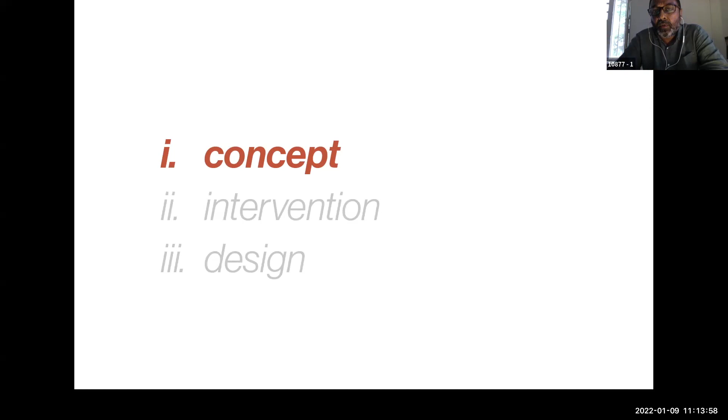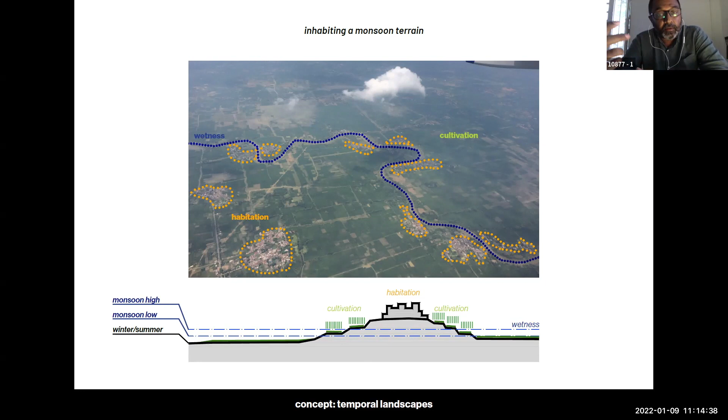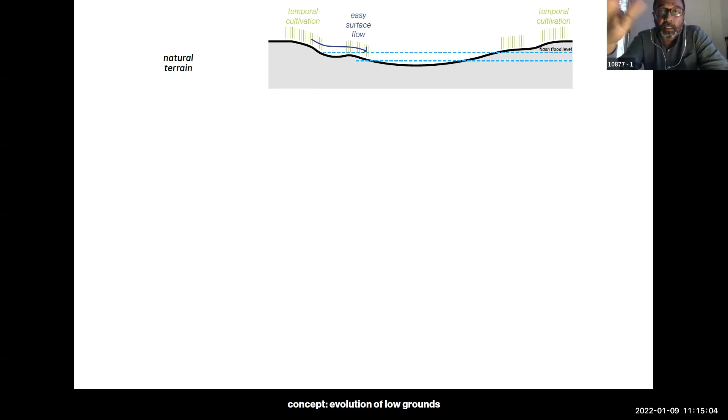Next, please. And looking at the evolution of the Raja Kaluve, the Nala itself probably was a broad swale, a sort of low ground, and typically there would be some kind of cultivation along the gradients, and a variation in water levels or wetness through the seasons. And this is then being transformed as a part of the urban intervention into a constricted hard channel, so basically you're trying to contain water.

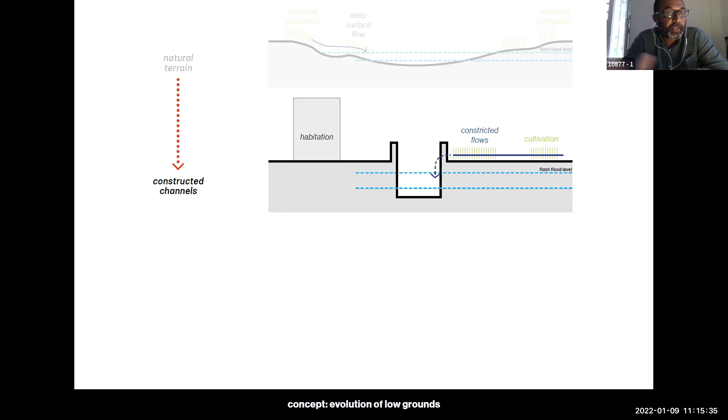And so we question this hard channel approach, which actually constricts flows and is part of the larger problem of flooding that we experience in our cities. And so what we propose, working within the framework, is really an intervention with a stepped gradient, which works within the framework of what already exists, but also accommodates possibilities of variation in wetness and water levels over the year, but actually becomes an accessible space.

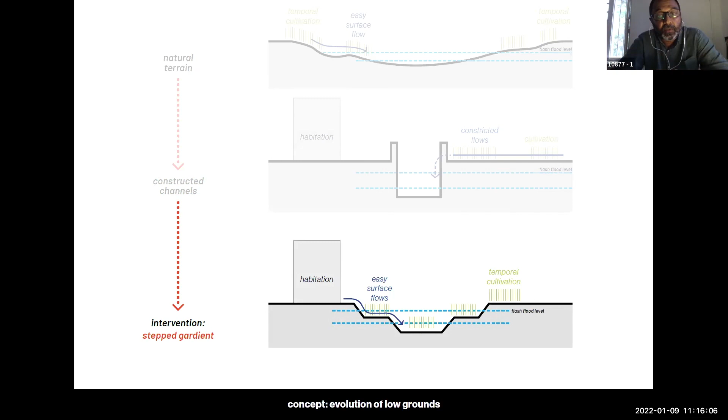Next, please. The other specific observation, besides all the normal stuff about the site, was right through this neighborhood, Kalyan Nagar, and actually in Bangalore, citizens have really gone out of their properties to cultivate and to garden. And this is very evident in our site all along the Nala and even in the neighborhood itself. So there is this green thumb instinct, which seems to be really strong.

And at the same time, at one end, you have the nurseries. And of course, we have the broader context of the totas and the Huvina totas, the flowers, and even the commercial aspect of flower selling. So this was another reference point, and we were thinking of the link with what we were talking about earlier, the gradient and cultivation, and maybe bringing these together into some kind of synthesis. Next, please.

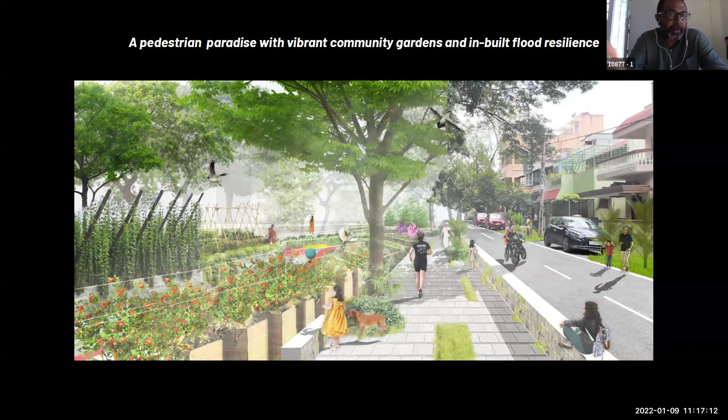So the question was, can you construct a pedestrian paradise, a pedestrian-friendly environment? That's taken for granted that you want to go in that direction. But can one really create a pedestrian paradise with community gardens, which also has, through these processes, an inbuilt resilience to floods? You get a broad picture here, and we'll explain the details of the section as we go forward, but this is just a broad idea of how these three things come together. Go ahead. Next, please.

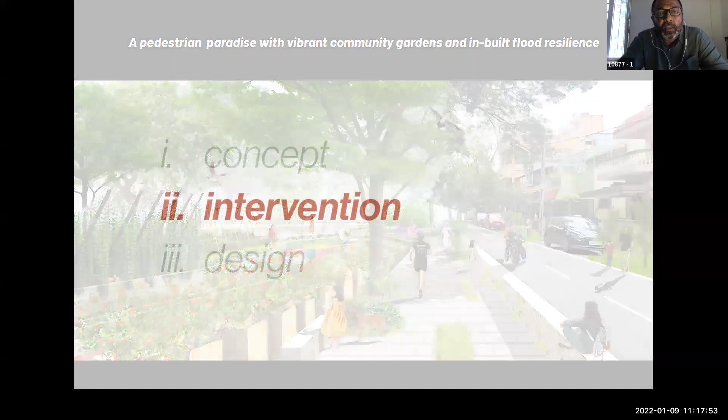So for the specific intervention that we are doing, we have some goals in mind. We're talking about productive landscapes, therefore urban farming, community gardens. Then, of course, everybody wants more space available, pedestrian-friendly space for recreation. So you're talking about play areas, walking, plazas. And at that intersection, there's the idea of including everybody, all the good practices, universal access, place for the vendors, communal market days, and of course visibility. That's a very important part. Making all urban spaces visible, gender and age friendly.

Then, of course, mobility with an accent on enhancing pedestrian-friendly networks. With sensing local, local residents have already been quite active in this area of pushing for pedestrian rights, and one would like to build on that, creating systems of slow traffic with rationalized road widths, and seamless movement in, across, and around the low ground. And with all this, there is a hidden system which looks at the ease of flow in extreme conditions, porosity, recharge, holding tanks, etc. Next, please.

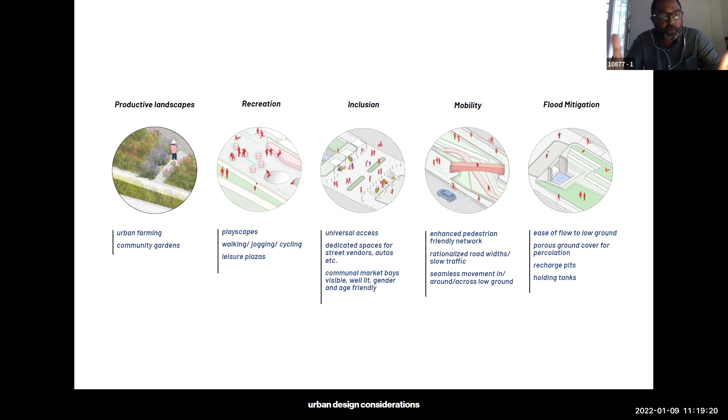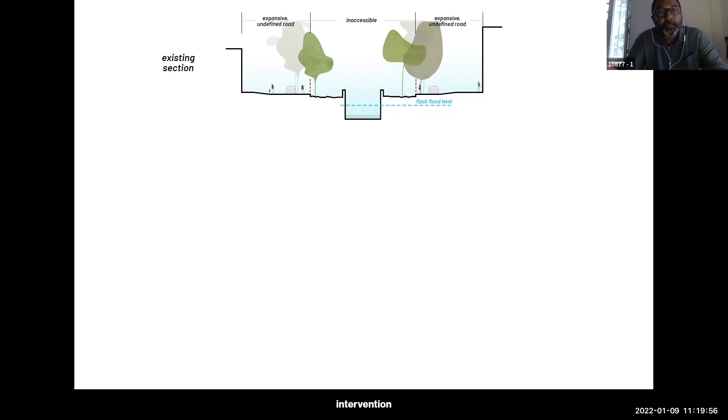So when you look at the existing section, you have this very undifferentiated, very wide road in terms of what it's servicing. And then you have the fence around the nala, because by default, when you have a space which is inaccessible, the hard channel, invisible, it is prone to abuse. And then to prevent people from throwing things inside, you create an inaccessible zone around it. So pretty much you create the problem, then expand the problem, and make it more difficult for people. And actually what you're losing is space.

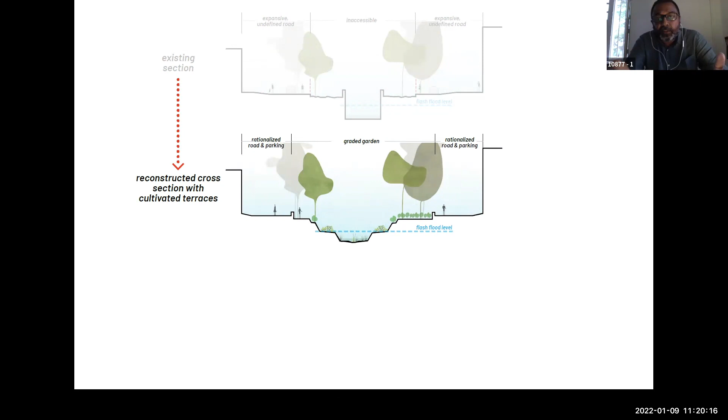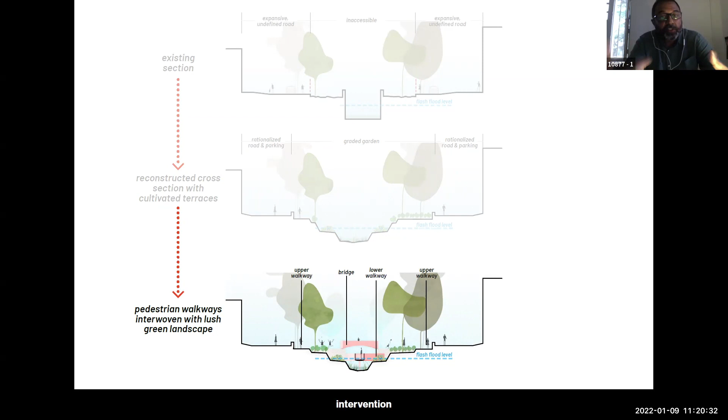So if you rethink that hard division between high and low, and look at it as a gradient, possibly an accessible stepped gradient, you create more space by rationalizing the road and parking. And then you look at this possibility of cultivation. And as a last layer, you have the pedestrian walkways at two levels: an upper walkway, a lower walkway, and of course the bridge crossings, which interweave the human intervention with the landscape. Next, please. So we'll move forward to the actual design, the master plan.

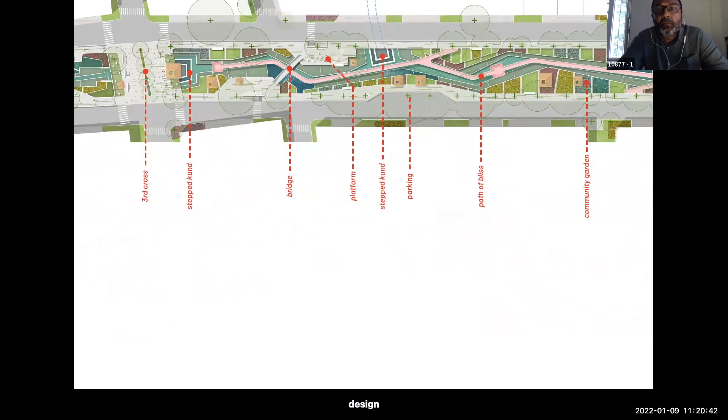One second. Yeah. So you can go ahead.

Yeah. So what you're really talking about is at the third cross, starting from left. I'll just quickly run through. You have a plaza, which is a communal plaza for events that could be temporary on particular days of the week, and you can continue the paving across that area, creating space for vendors, and you could block that off on these Sunday days, where you could sell the produce of your communal gardens.

And then you have a series of kunds along the low ground of the canal itself, located strategically where the flows come in from the streets, because the street network is effectively becoming the drain network, which feeds the existing nala. And then, of course, you extend the high ground and retain parts of the old nala wall. So you're talking about opening up the nala, retaining parts of the wall and extending the high ground there. And at these points you have the bridge crossings, which are loosely connected with the street network.

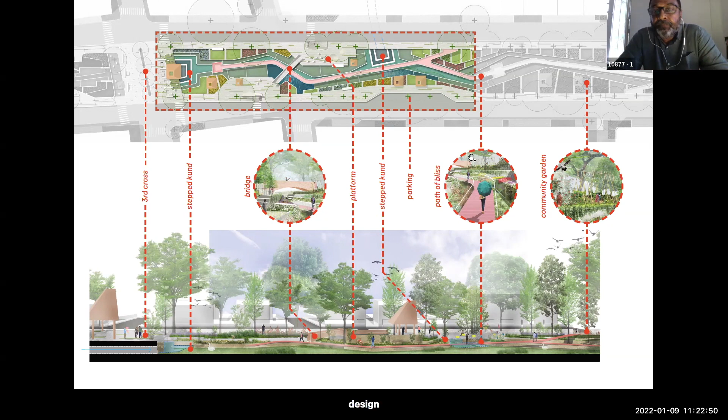Pause platforms happen along these extended upper levels. And again, you have another step of water retention happening there, where that cross nala comes and connects. And then we've looked at this idea of the temporal landscape, that you can move down into the nala, and you have this meandering path, which we call the path of bliss, which winds its way through this cultivated landscape and the community gardens.

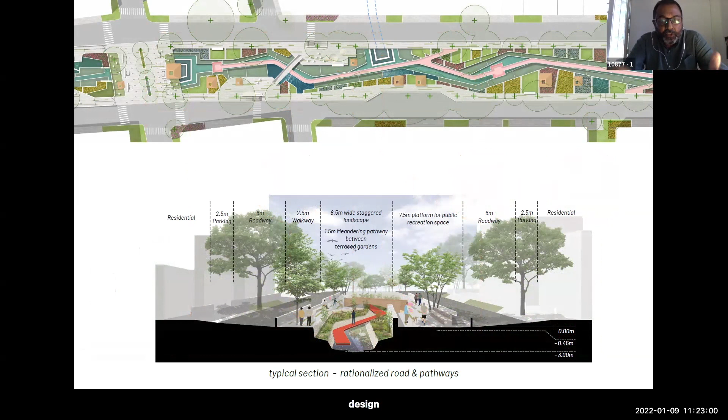If you look at how the street section has been looked at, you have the residential buildings, and then you leave a lane for parking because everybody parks on the streets. These are smaller plots, and you really need to keep that parking. Then you rationalize the road width to a slow movement, six meter wide roadway, and so you gain space for your pedestrian areas. Then you have 2.5 meters for the walkway and 8.5 meters for the landscape area. So that's how that section is organized.

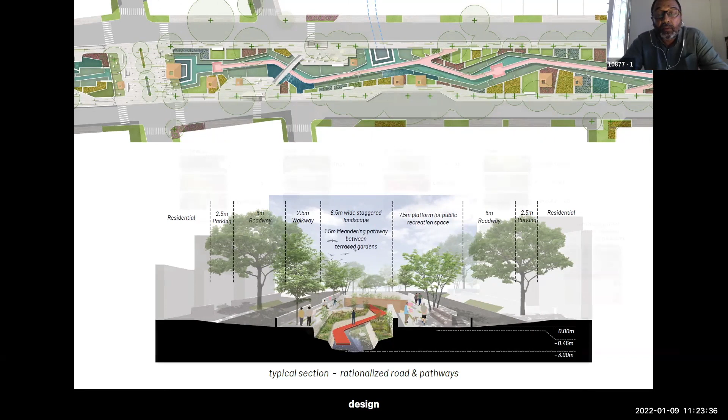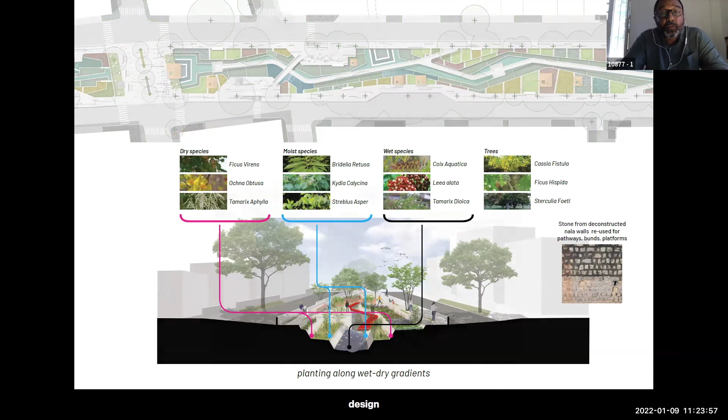Next, please. And then the planting would be organized, graded from dry to moist to wet species. Obviously we're not going into details of that. Can we move forward? And then we'll focus on individual parts.

So if you look at the communal third cross intersection, we're talking about extending the paving there and creating a diversion. It's a very dangerous intersection because people cut across diagonally in this area from the two sides of the nala. So we're creating a diversion there, also trying to slow the traffic down. And then you provide space for the vendors and auto rickshaws, and this can be blocked off on special events where you sell the community garden produce.

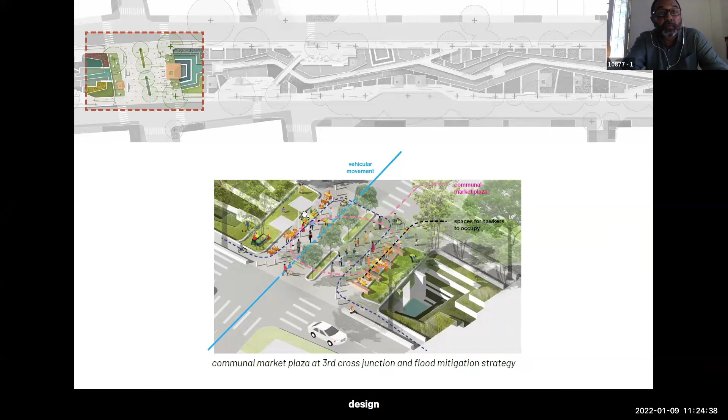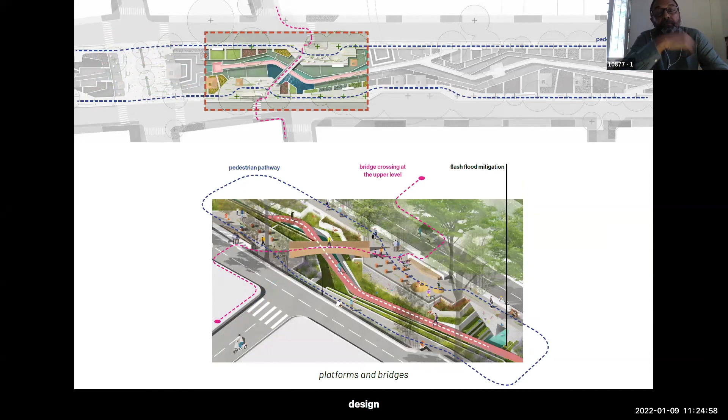Forward. And then this seamless mobility. You have this high-level mobility, which is connected to the street, then the lower meander, and the bridge crossings. You can also see some of the points at which water drains into this area. And then the lower path, which winds its way through these gardens with these pause spots.

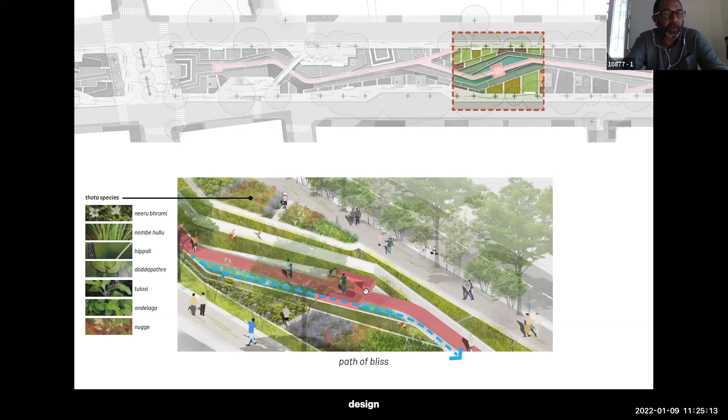So our approach has been that this is a stormwater drain, and there shouldn't be sewage going into it. I've crossed this nala every day for the last 20 years, and what you have is a trickle of some illegal sewage that comes in, and 99.9% of the year there is no water in it. Other than the sewage, there is no stormwater flowing in it. Even when it rises to what we've seen as the flood level, probably less than half of the existing nala, it happens only for a few hours. The flooding outside it is mainly because water is not able to flow into it. So it should be looked at as an area which is accessible for

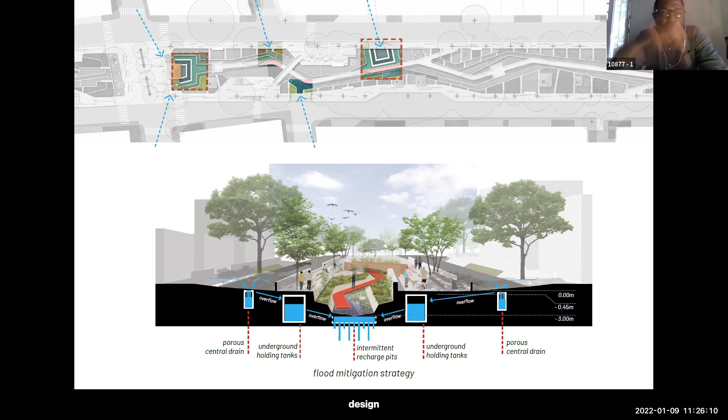350 days a year. Sorry, I was just going to say, if you could wrap up, that would be great. Yeah. So we have a system of overflows and how the flood mitigation happens. Go ahead.

And then this is the path, maybe a little romantic, but as you descend into the space, the city and the whole hustle and bustle disappear, and you enter a liminal realm of a secret garden or a forest in the city. Thank you.